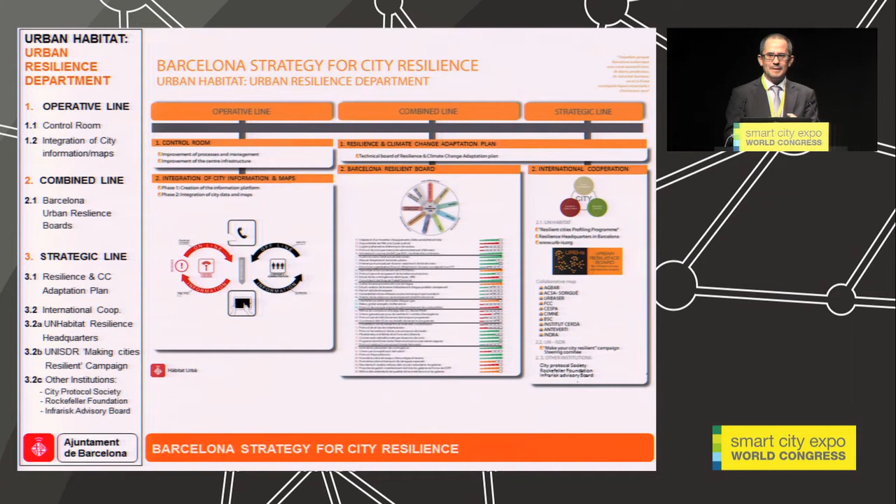So this is the main idea, this is the global idea. My presentation was more a description of each of these lines, of each of these actions, but I think I have explained the main idea now.

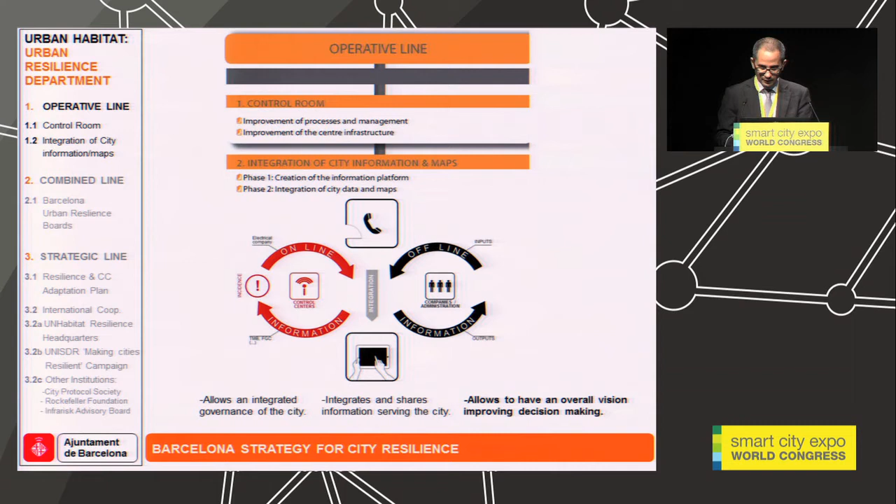Anyway, this is the operative line. This is the integration of city information maps, offline information and online information. Offline is for accumulating the smart city planning, the maps of the city, and the online information is for the treatment of incidences, for faster communication to all the services involved.

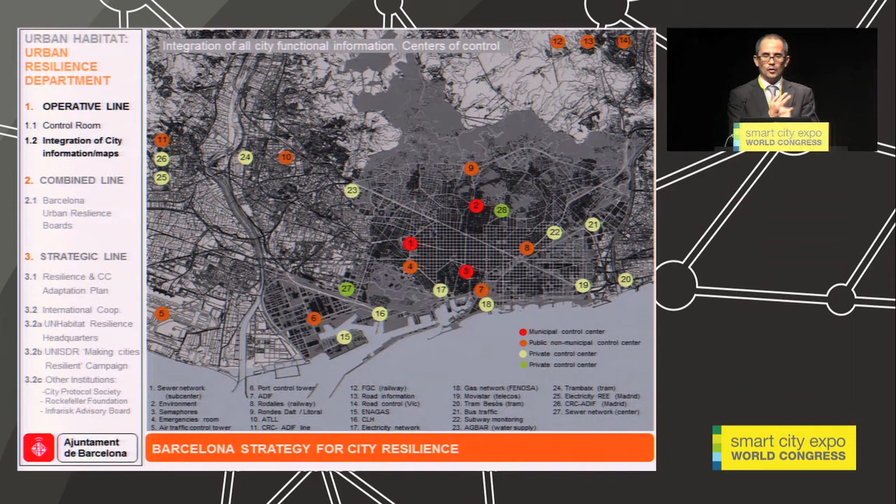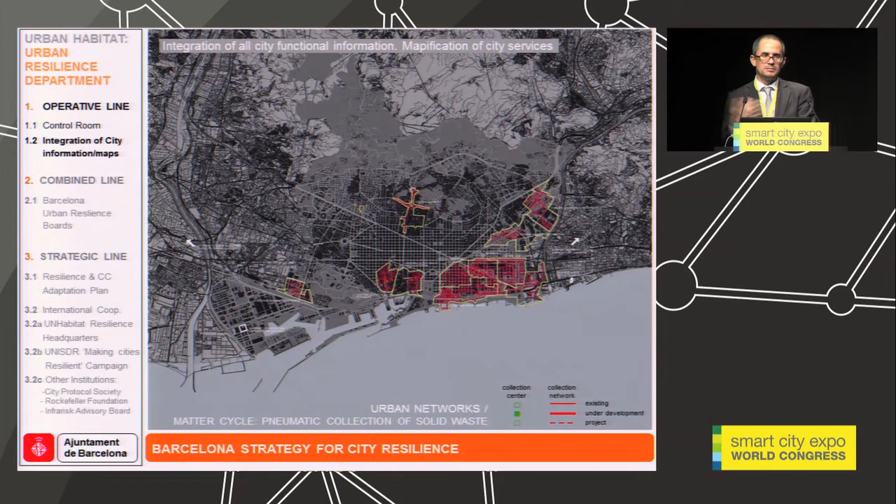These are the objectives, the projects under development related to this branch. These are all the control rooms in the city that will be coordinated by this global project of mapping the infrastructures, the different control rooms of all services - railway, roads, etc. - 27 of these centers. These are all the maps we have of the different services in the city: telecommunication, electricity, water cycle, fuel, etc. We are putting all these maps together to exploit all the information.

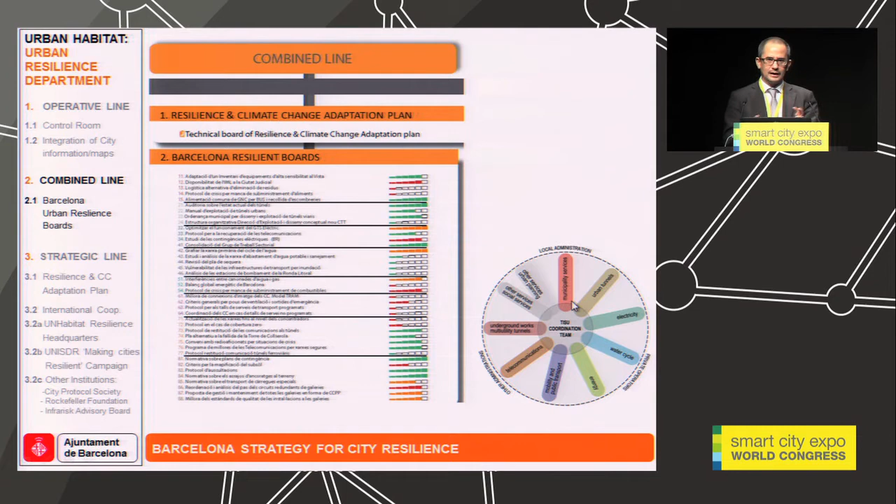Transportation networks. So the combined line, this is the map of all the projects we developed. From this, and this is the task force that we concentrated for collaboration in the development of these projects.

This is the main graph of this task force. You can see the state of the situation: 72 professionals from 37 entities and 40 improvement projects.

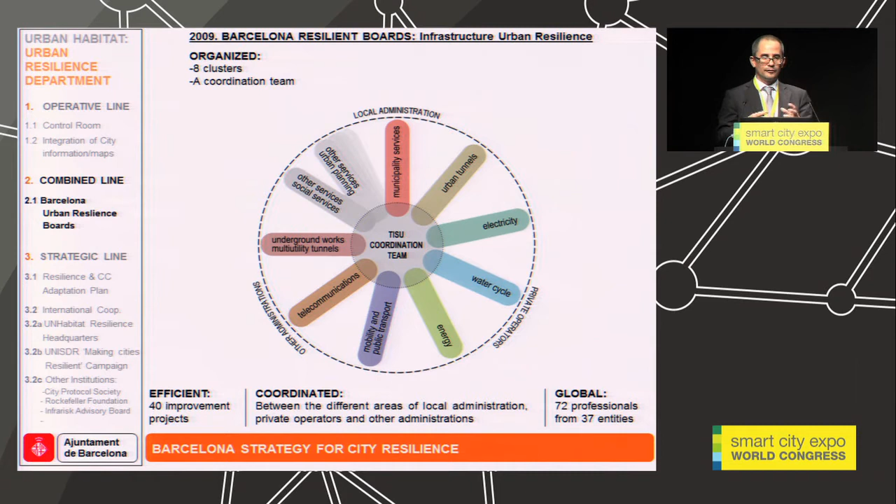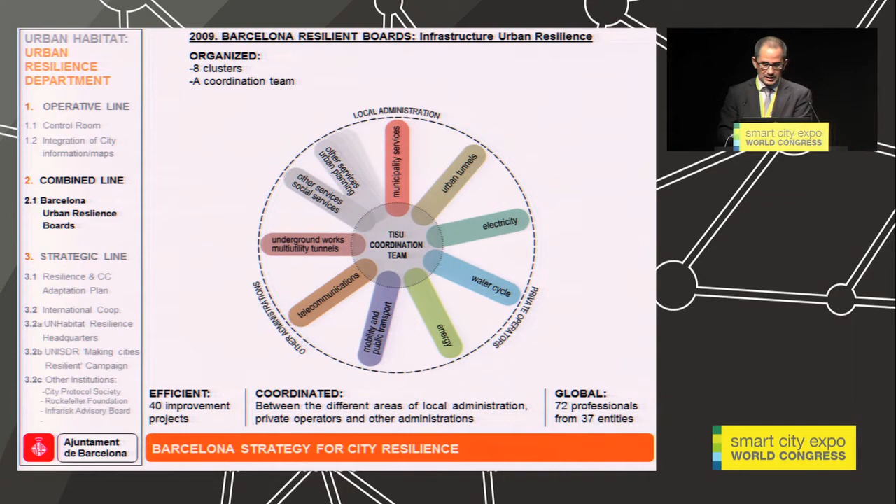We are transforming this collaboration system with other services like urban planning, social services, etc. And we will put together some of the existing groups. So we are transforming this system that was originated in the technological way for the implementation of the climate change plan, climate change and resilience plan.

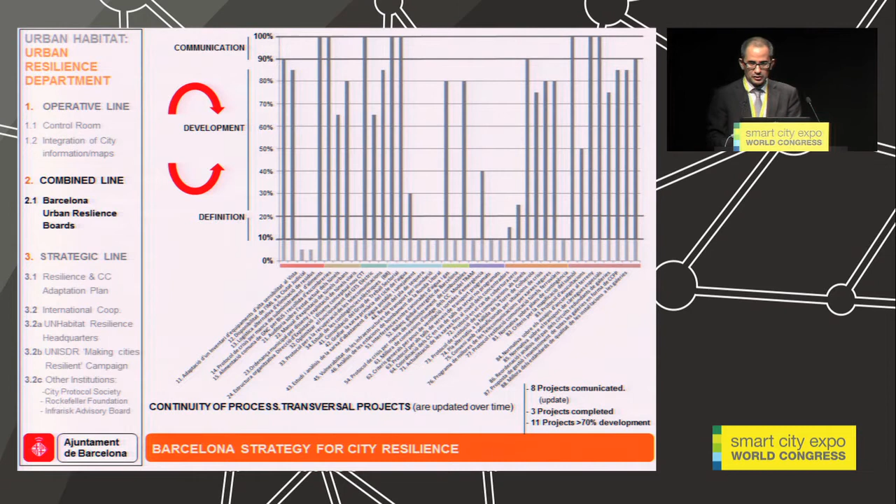These are the state of all the projects. We have 8 projects communicated and finished, and then 3 projects completed, and 11 projects that are developed more than 70%. And these are the state of different projects. I will not explain.

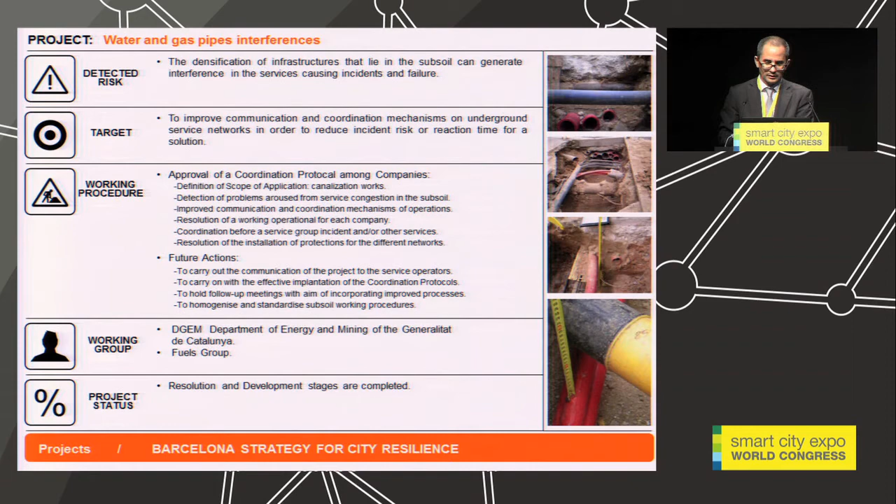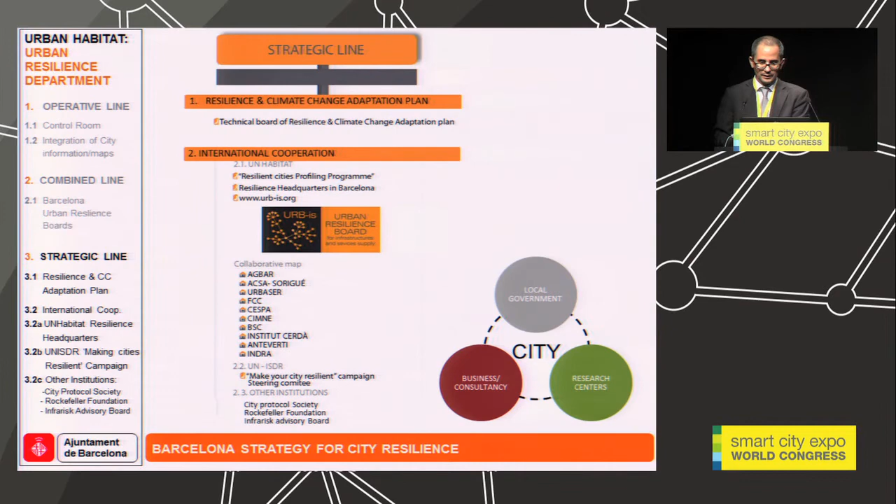With UNISDR, we are part of the steering committee of Make Your City Resilient campaign. And we have another collaboration, like, for example, the City Protocol Society. I will explain there.

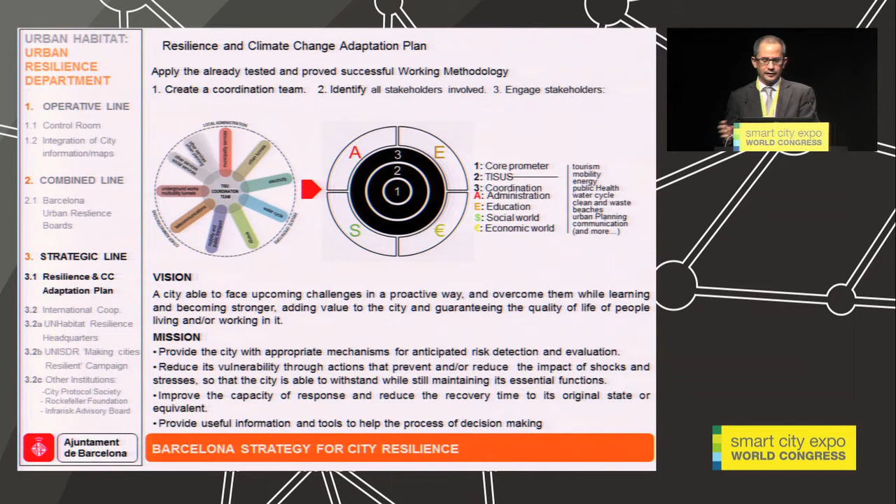This is the transforming of the actual situation for the future one. It was the beginning of our process in the Bonn Global Forum for Urban Resilience and Adaptation, when we discovered that we can add value to the other cities in the combination of all the resilience related to not just the infrastructure and the other services.

There was the signature of Joan Clos, Executive Director of UN Habitat, and the Mayor of the City of Barcelona, for the implementation of these offices in Barcelona, and the rest of cities that are involved in the CRPP program.

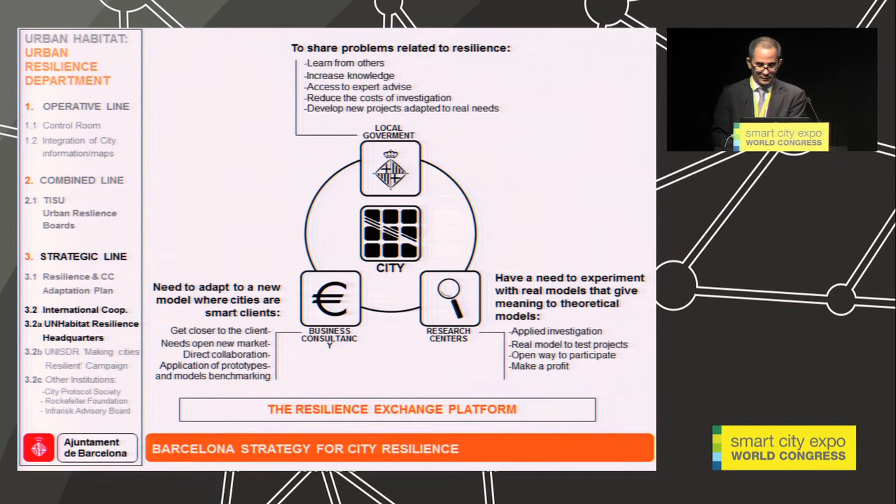This is the scheme of the combination of all the stakeholders that we have to involve in this process. With these actors, we configured a platform that is URB-is, Urban Resilience Board of Infrastructure and Services. We gave this platform to United Nations, and I think in the future of United Nations, it will be the base platform for the collaboration between the cities.

So actually, it's not a platform of the City Council, it's a platform of United Nations, but I think it's part of our collaboration. This is the certificate of Barcelona, like a role model for infrastructures and services, and like a member of the steering committee of the campaign.

The inclusion of all this process related to urban resilience inside the City Protocol Society was founded some weeks ago, and one of the first branches of City Protocol is resilience. So I invite all the entities and enterprises working in this field to collaborate together to implement the city protocol contents.

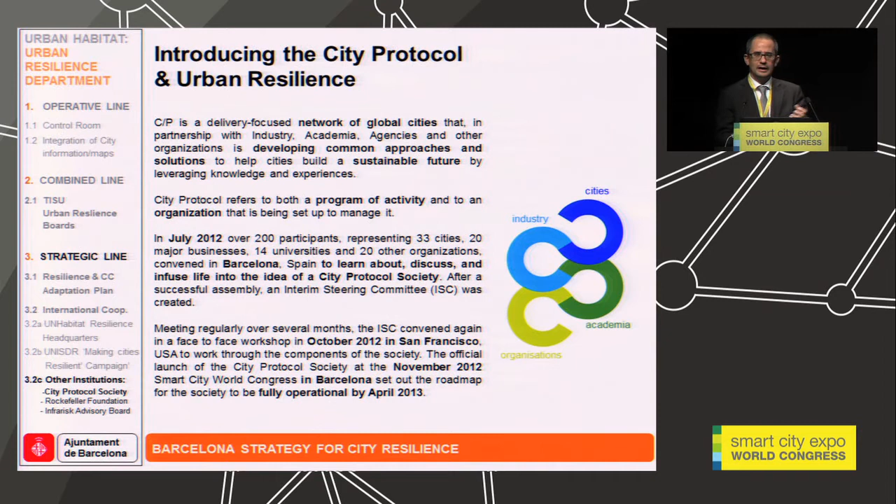It seems the city protocol is related to the understanding between cities with a global terminology. So I think it's a very good thing, because for collaborating and sharing experiences between the cities, it's very important to talk in the same language. And this is all the information.

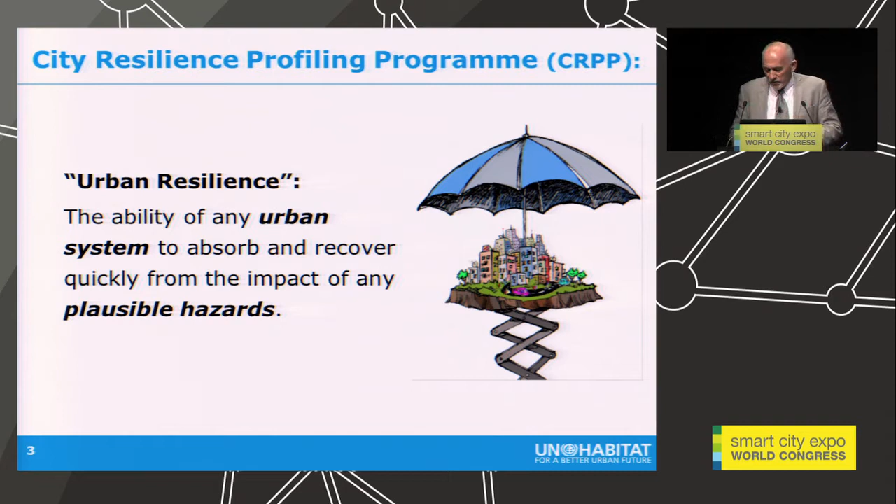And finally, I'll introduce a new concept that builds on what Manuel mentioned about our resilience profiling program. So, reducing ambiguity: first thing is to have a definition you can live with. For us, after a lot of soul searching, this is the definition we came up with, and we don't deter from this—everything we do fits under this kind of framework definition. Urban systems and plausible hazards are the two key factors in this definition for cities.

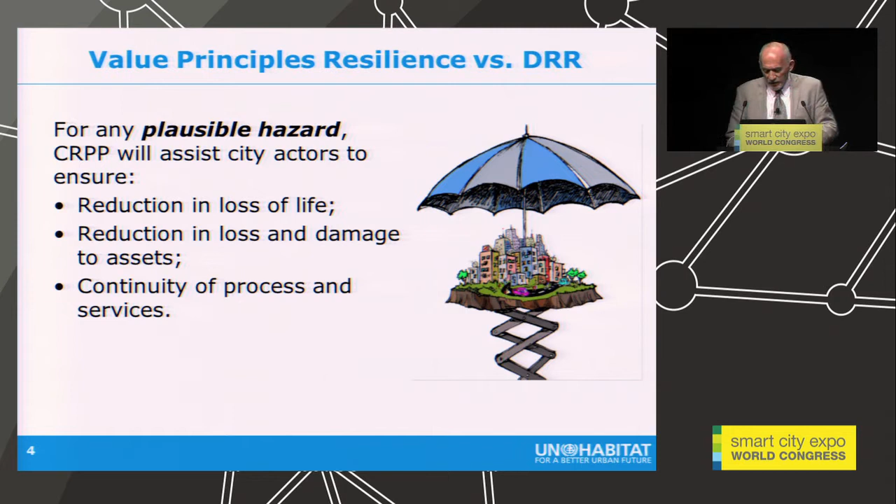A couple of value principles: the first two, loss of life and loss and damage to assets, are the value principles for most risk reduction programming around the world. What we see missing in a lot of the work we do, both within the UN and outside the UN, is the whole continuity process—the continuity of function of cities, the continuity of processes that take place in cities. Consequently, what we're trying to do is build the widest potential array of hazards that we can test, ones that would plausibly impact the cities we work on.

So this is the framework under which we are developing the broad framework under which we are developing a set of tools, a set of guidelines, a set of indices that will ultimately inform the standards that we try to promote at the conclusion of our research and development and tool development programming.

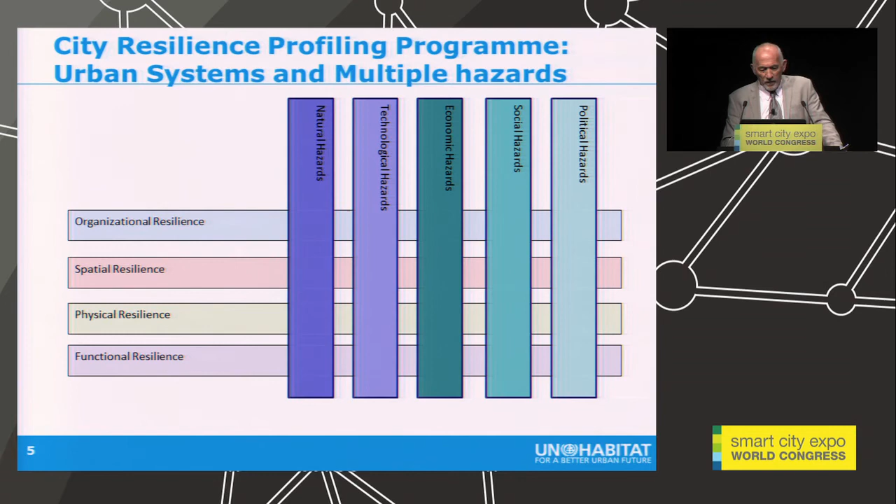Again, a key feature here is reducing ambiguity, increasing certainty. Why do we do that? The billions of dollars, you heard the numbers James mentioned earlier, that are lost through disasters over the last decades, all have to be reinvested.

And a lot of our partners are saying, well, hang on a minute, we need to think about this a little bit more. Building back better doesn't quite do it. It's not enough. Building back elsewhere might be enough in some cases, but we need to think through a little bit more of the certainty of investment in reconstruction and in building resilience.

Just a note on the catalyst: it's a sad fact of life that interest in building resilience is generally considerably higher following a disaster than it is before one.

And in many of the cities that we work, the highest priority, as Manuel said, arises as a result of a range of different crises. Multiple hazards, we talked about already. The consideration of withstanding and bouncing back is looking at issues like resistance and elasticity of systems, and trying to calculate and calibrate the degree to which city systems can do this.

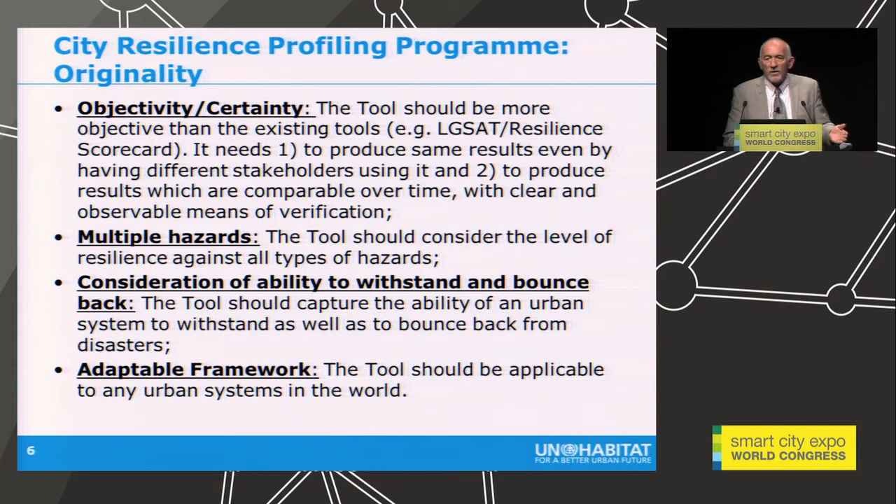And obviously the final principle is what we develop has to be useful everywhere. It has to be useful in Balangoda in Sri Lanka, and it has to be useful in Los Angeles or anywhere else. So it's adaptable, the framework is adaptable.

What are the benefits? This is what we're talking to our business partners about: credible commitment and investment, opportunities to apply local strategies. The stuff that Manuel talked about is not applicable in Balangoda or in the Philippines at the moment, but eventually it will be. And the lessons they learned and the process they underwent to get to where they are today, far ahead of many cities, has real added value, both for the private sector partners and business we work with, but also for the agencies and the humanitarian community we work with as well.

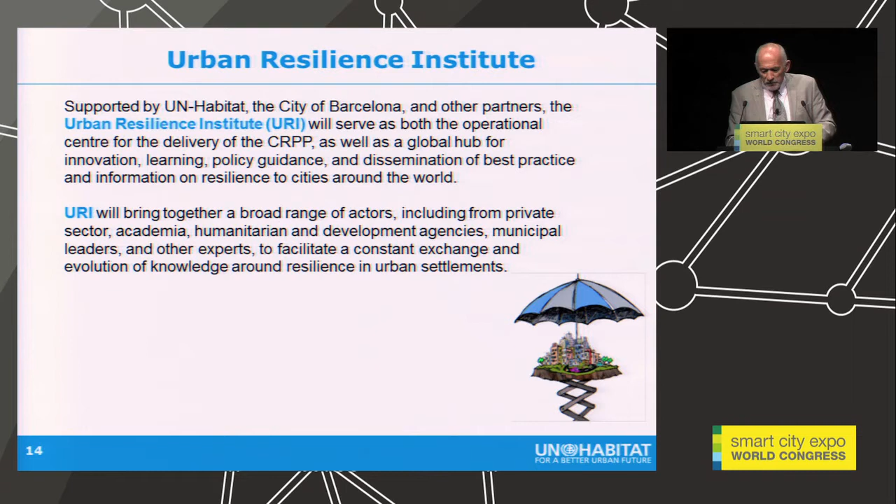And the third is operational stuff - working directly with cities, or with city networks, or with partners who are working with cities in actually implementing programs on developing urban resilience. This is where we hope everything will conclude and become public domain during Habitat 3 in the latter part of 2016.

And that's everything I have.

Thank you very much, Dan. Appreciate that. Next on our list, I'd like to welcome Ignacio Valero, the Manager of Technology Transfer at the International Center for Numerical Methods in Engineering, or CIMNE. He's also an Associate Professor at the Universitat Politècnica de Catalunya for the past two decades, with extensive experience in various infrastructure fields across Spain. He's going to talk to us today about the role of prevention in building resilient environments in developing areas. Thank you, Ignacio.

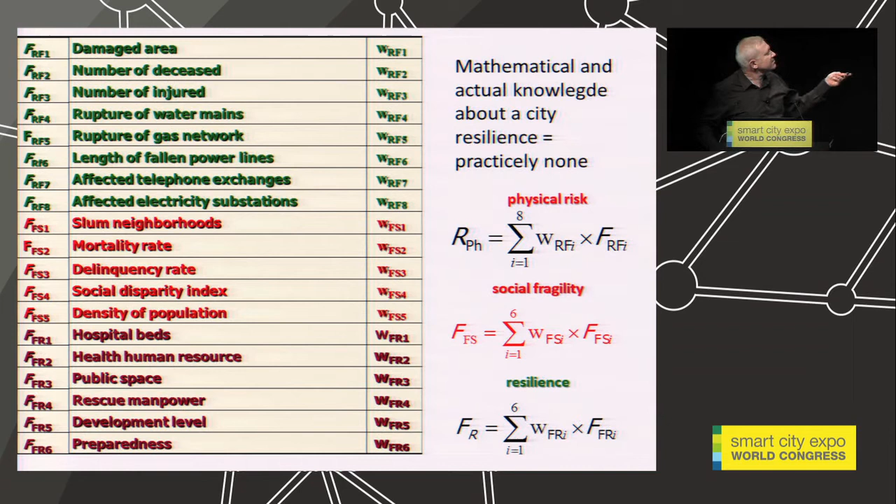When we go to the formulation, our core way of work, we analyze all these indicators. We have, for example, a formulation for resilience that at this moment maybe doesn't say much to all of you, but we think that mathematical and actual knowledge about city resilience is practically unknown, or only a bit of it exists—we need to develop more.

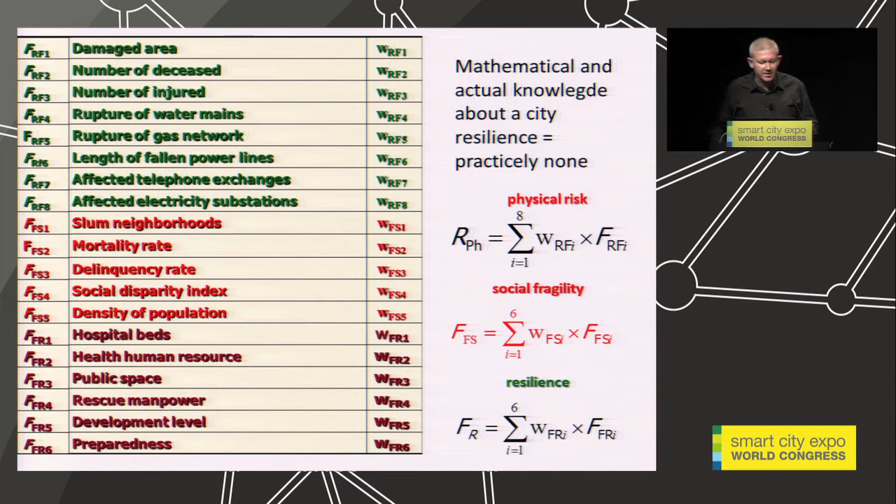I ask myself, is this the way to address the problem, this kind of analysis? I don't know. Here we see a formulation which continues to be an approximation. We know resilience is not simply the inverse of the risks as a mathematical development, but that mathematical development is necessary to achieve results that could be evaluated to get objectives, more than just statistics, which Dan showed a moment ago.

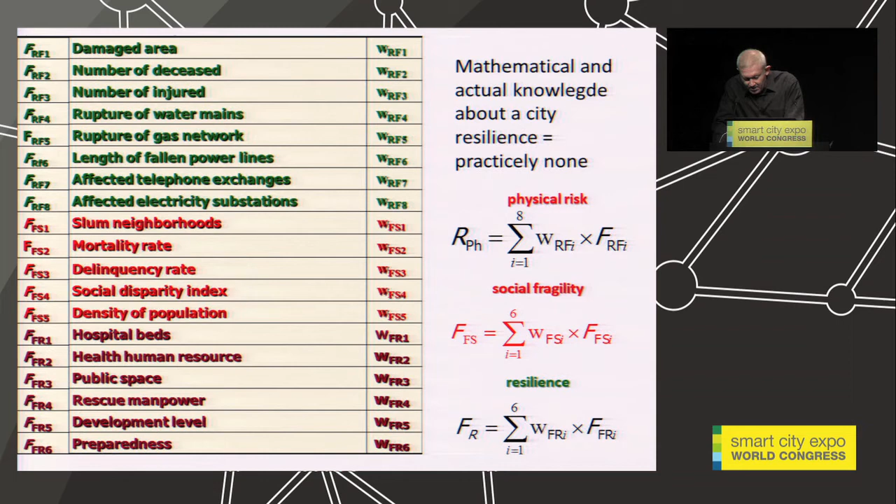How do we address the problem when the urban environment does not yet exist and we want to preserve it—also be systemic and resilient? Right now, we think that is science fiction, but we do have some capacities, of course.

Estimating risk, for example, as in the case of the earthquake in Barcelona, we are able to map this risk and determine the different scales in different places of the city. But we are not out of the place of risk yet.

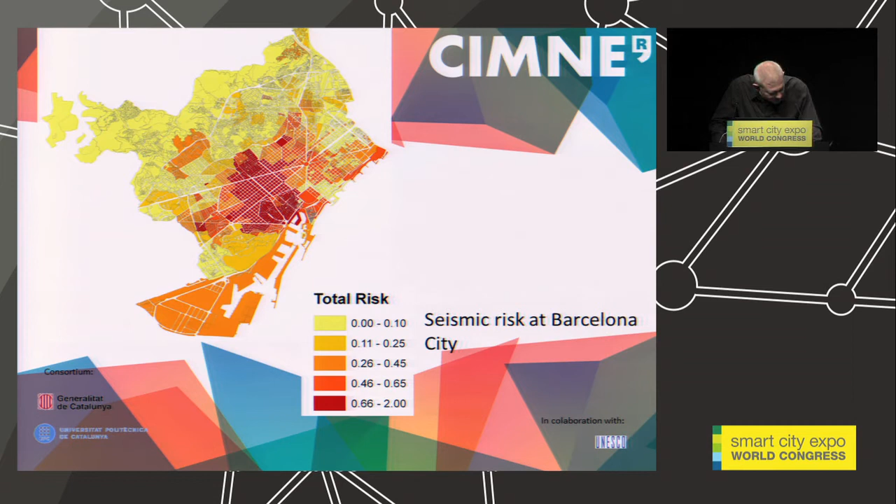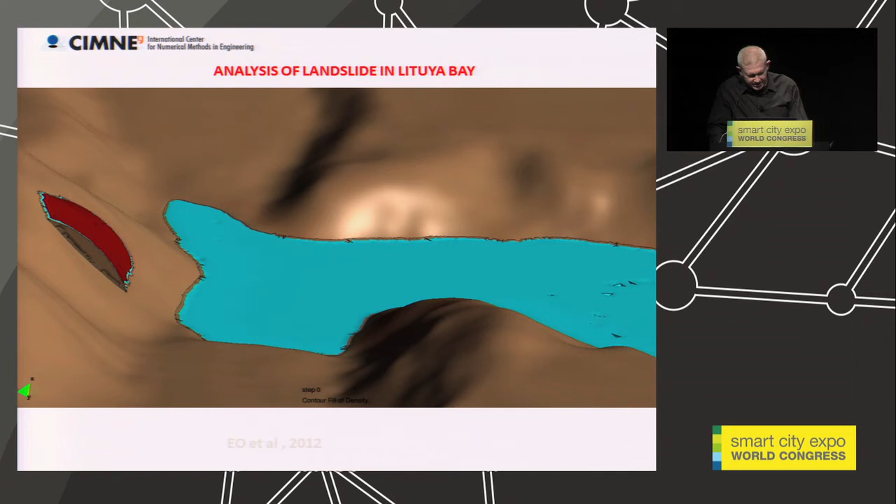Other capacities, maybe more sophisticated, for example, we are able to do things like you'll see. This one is the movement applicating the particle finite element method, of a slender piece of earth into a mass of water, or for example...

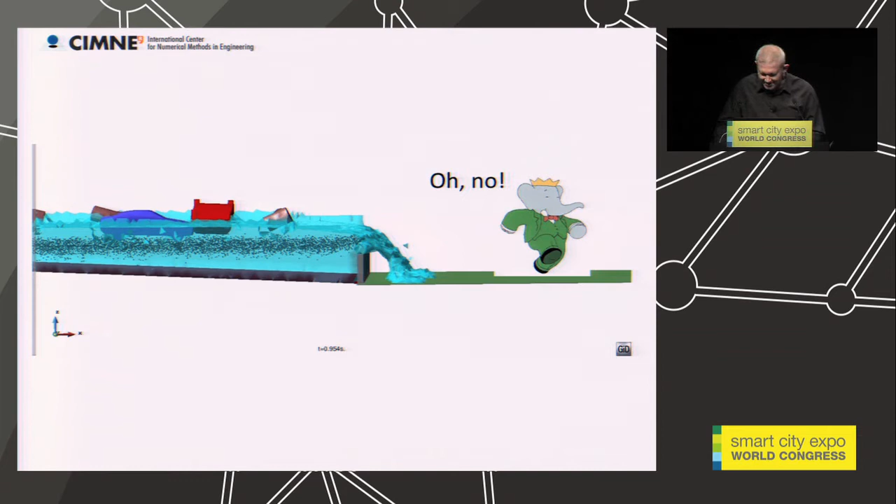The next one, Babar, not our elephant, represents the Fukushima simulation. You can see here the particles - the particles are a real novelty, an extension of finite element method, moving into a fluid with other elements in movement.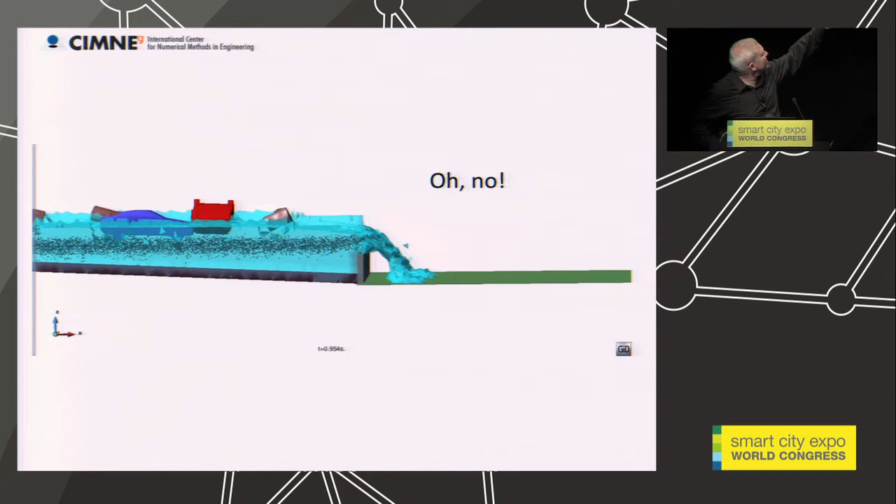And we can simulate, for example, this one, if it is able to play. I don't know why... well, I cannot show it, I can't see the simulation. I'm sorry, in this case.

But we are able to simulate the movement of the particles, the impact over the wall, after the fracturing of the wall, and how the elements in the fluid are moving in every situation of environment in a contour.

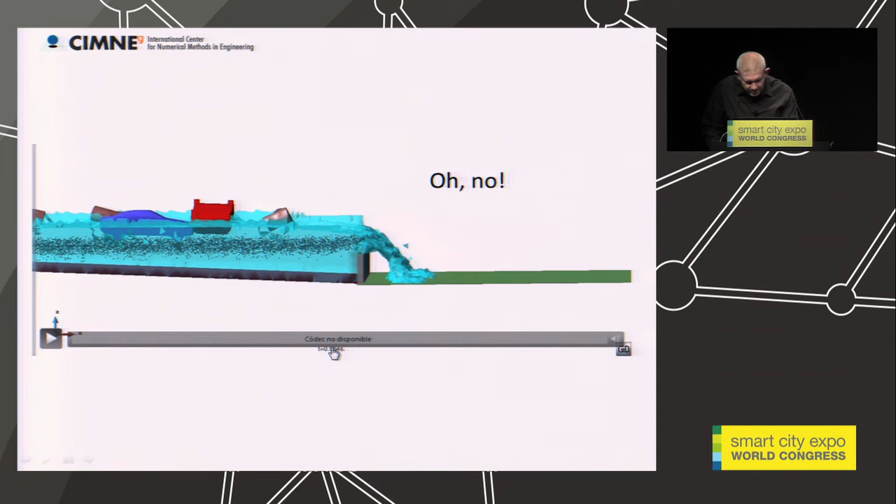At last, we do not want to keep seeing our friendly elephant taking a bath in the coast near future Dar es Salaam. We would be less happy if that happens, and therefore the obvious concerns here about resilience are not trivial.

To finish my speech, I borrow from my friend Manuel Valdés this sentence: in major scenarios, it's time to act. I think it was time to act, but I add another message - the most important one in this presentation: it's time, with more cities coming soon, to think intensively and deeply about resilience, to be happy jointly designing our environment and the urban habitat. If the preoccupation about environmental questions is human happiness, then maybe developing new towns from the point of view of resilience is also part of human happiness. Thank you.

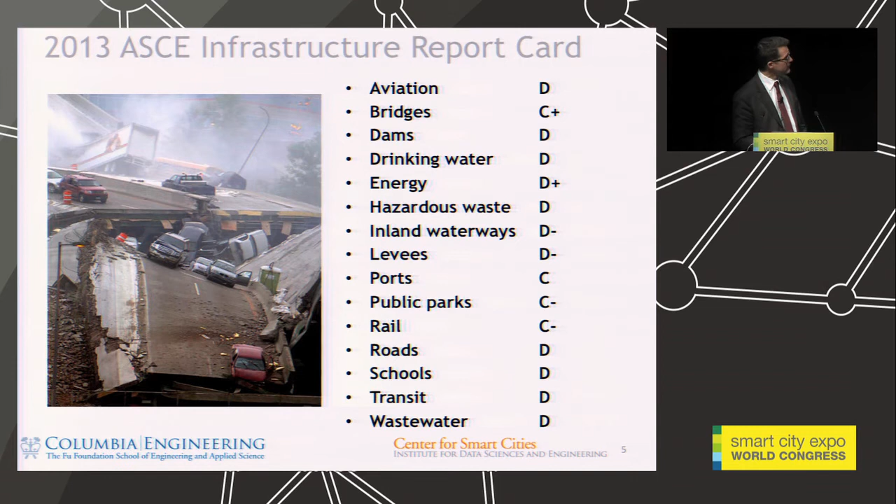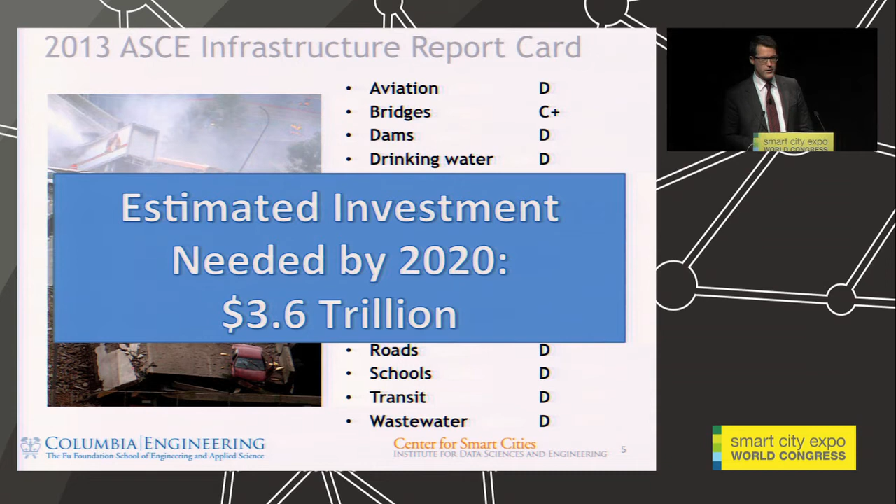Now, what I'm talking about in terms of resilience is against the backdrop of a US infrastructure which is in decay. Roughly speaking, we invest about half of what we used to, relative to GDP, compared to 50 years ago. This is widely publicized - the American Society of Civil Engineers infrastructure report card, which grossly assesses our key infrastructure elements, gives an average grade of D+. That's upgraded from a D in the 2009 report. They also estimate the required spending for 2020 at roughly $3.6 trillion. So there's a major change in investment needed.

So this is the backdrop under which I do research. From my point of view, resilience in the background is actually a decaying infrastructure. So while this is sort of an emergent or slow process, we may also be subjected to pulses or strong events, hurricanes, earthquakes, and other technological hazards.

My research is primarily in bridge infrastructure, so I'll talk about bridges first. Then afterwards, some discussion on flood risk assessment in New York City, which relates to the recent Sandy occurrence. And also I'll touch on some work in electrical grid city-scale risk assessment.

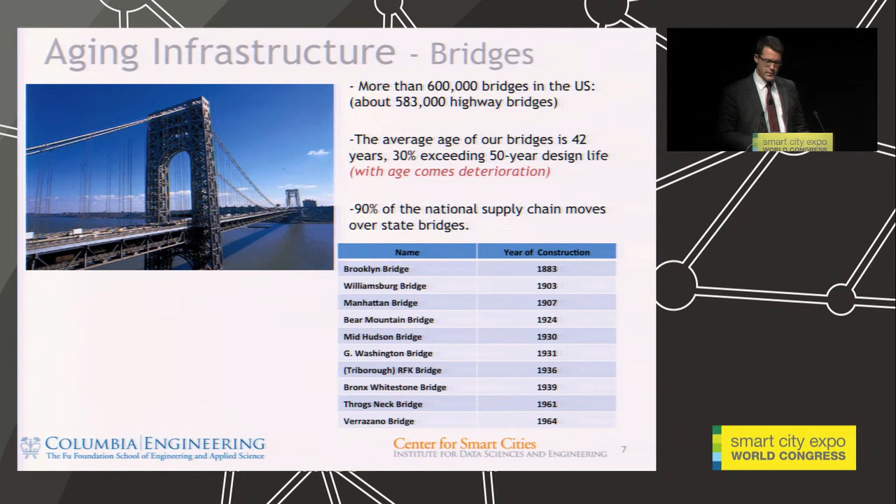In the United States, roughly speaking, 30% of our bridges have exceeded the 50-year design life they were originally designed for. So obviously this is a vital issue.

In Manhattan, we're an island, but all the different boroughs are connected with several major bridges. The examples I'll show you are on major landmark bridges, the first of which is the Manhattan Bridge, which has just exceeded 100 years in age.

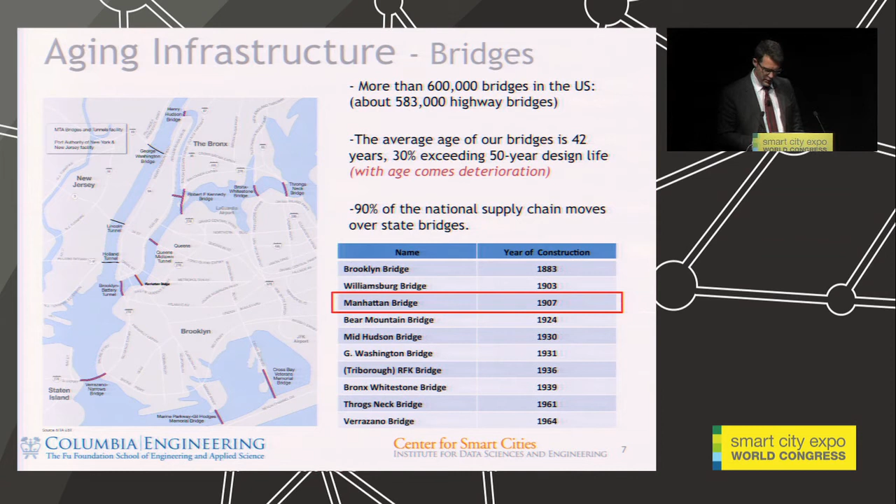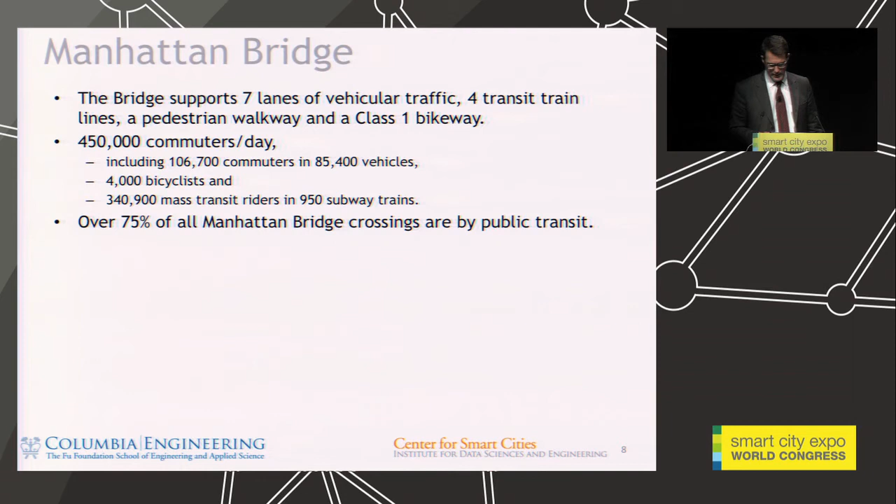Here's an example. It carries nearly 500,000 commuters per day. This is pretty typical for the East River bridges in New York City. A lot of that is mass transit, as you can see, so subway trains cross the Manhattan Bridge on a rather frequent basis.

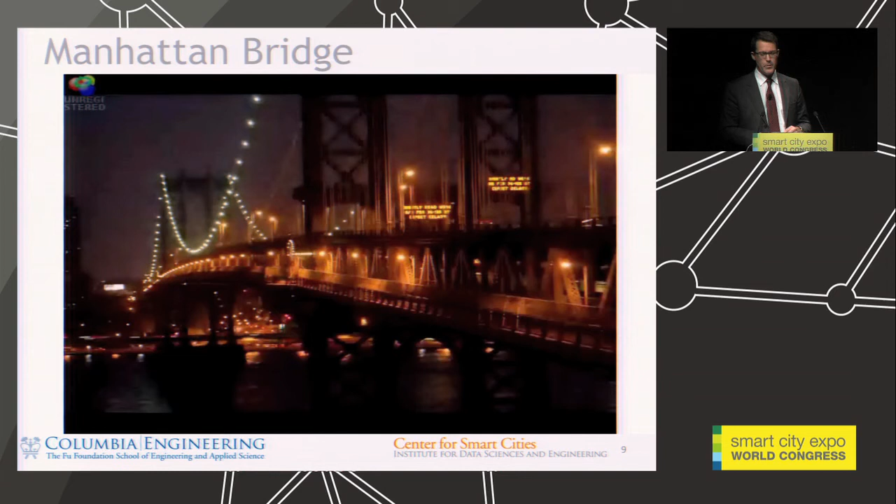This is a stop motion video over a normal day, so no particular hazard, but I'm trying to convey the idea that routine daily wear and tear causes tremendous fatigue loading and cycles on each individual component. So one of the things we need to understand in order to assess our current vulnerabilities is what the baseline condition is of our infrastructure today.

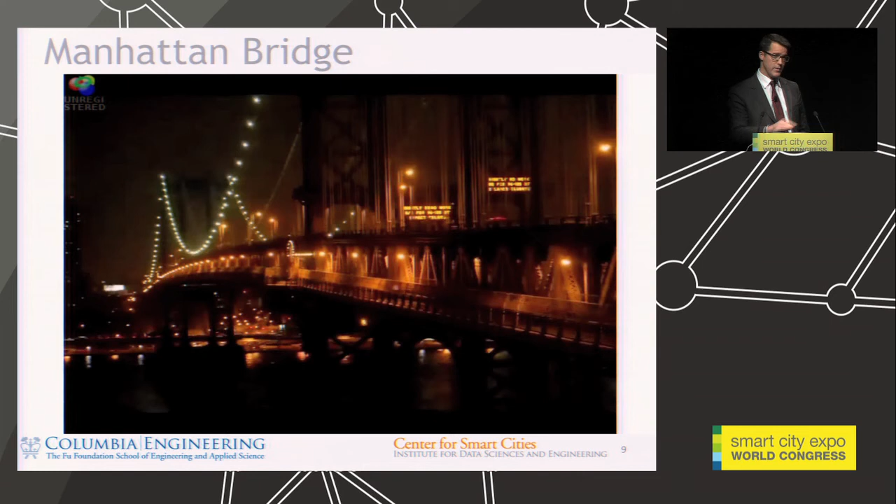Remember, it's in a declining condition. So how do we do that? This is one of the projects I was involved with in 2008. We take a lot of measurements.

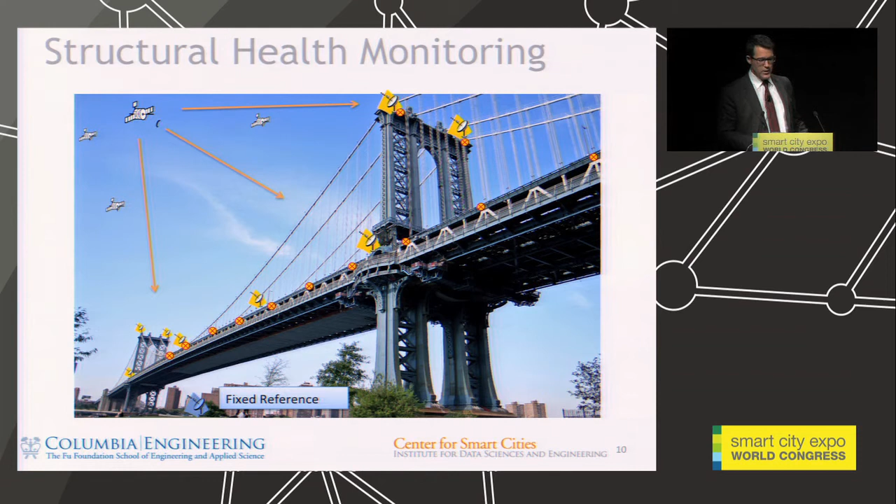In this case, we were using differential GPS to get very accurate dynamic displacement measurements, and we coupled that with an array of accelerometers. We could use many other sensors as well - we do radar, interferometric radar, and plenty of strain gauging. All of this gives us a very complete picture of a particular infrastructure asset.

Just an idea of the kinds of data we can measure - these are the displacement measurements, and each one of these blips is a subway train passing. This gives an engineer direct knowledge of how much deformation there would be on a particular element. So this is very, very valuable.

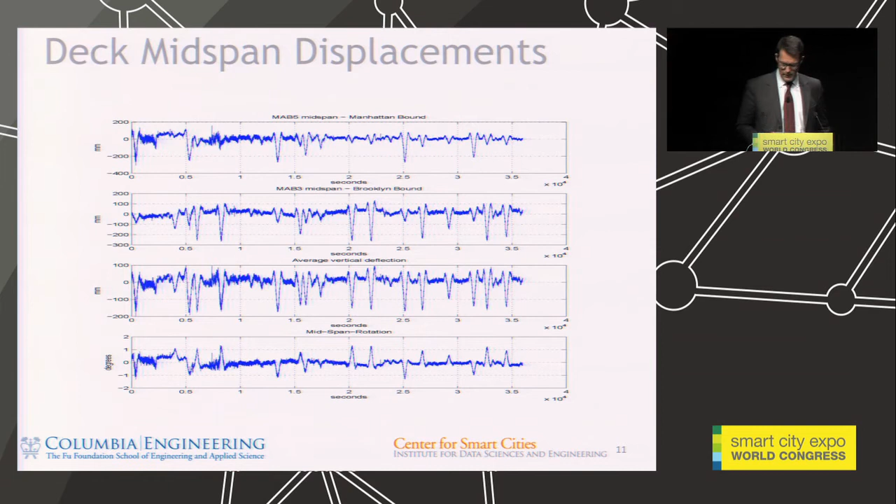It's data, but if you have a domain expert, it can be used to get very valuable information. Here we are updating or fine-tuning our mathematical model of the particular infrastructure asset, in this case the bridge, to assess its current condition.

These fine-tuned models can then be used to perform simulations. We can subject the bridge to seismic loading, hurricane loading, whatever you like. But in order to do that, you need to understand what the current condition is.

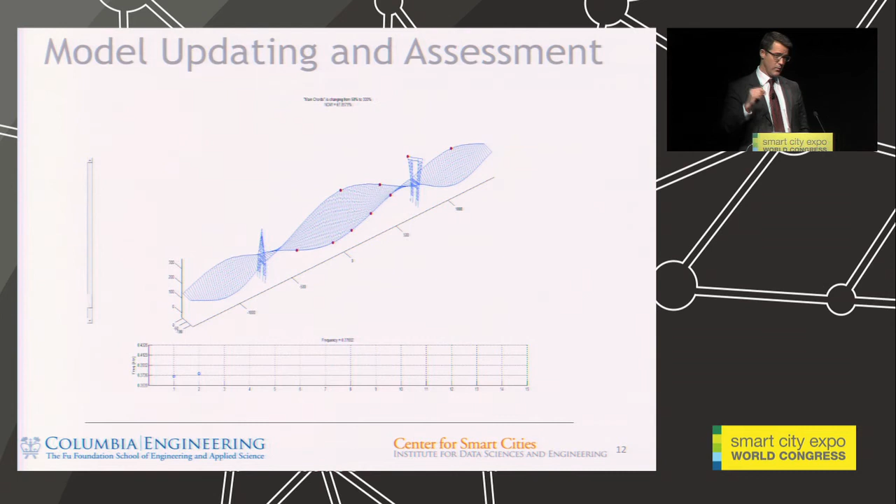We did the same thing for Verrazano and many other bridges. The Verrazano Narrows Bridge is the longest suspension bridge in America. Here's one of the tests we did during the New York City Marathon - we used this as excitation to understand how the bridge performs, in particular how it's going to perform in high wind conditions.

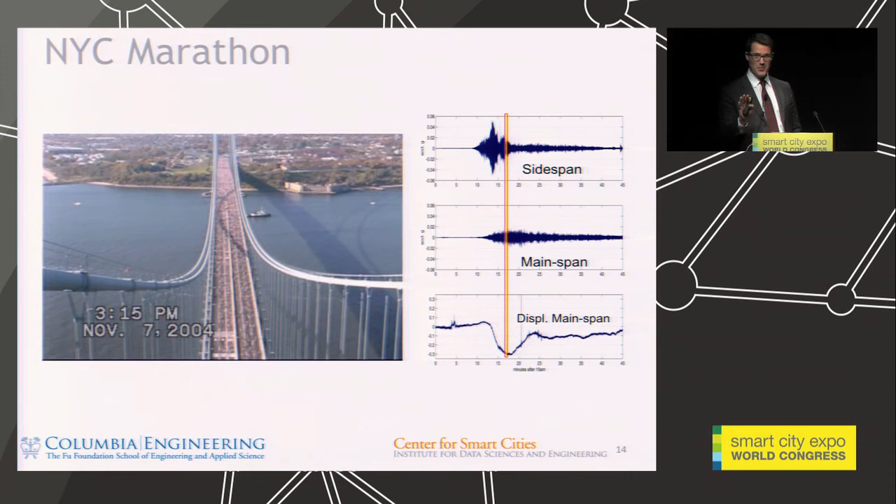These signals here, while it just looks like junk at this resolution, there's an awful lot of information that can be extracted in a diagnostic sense. That is my research, but I'm not going to bore you with all of those equations and theories.

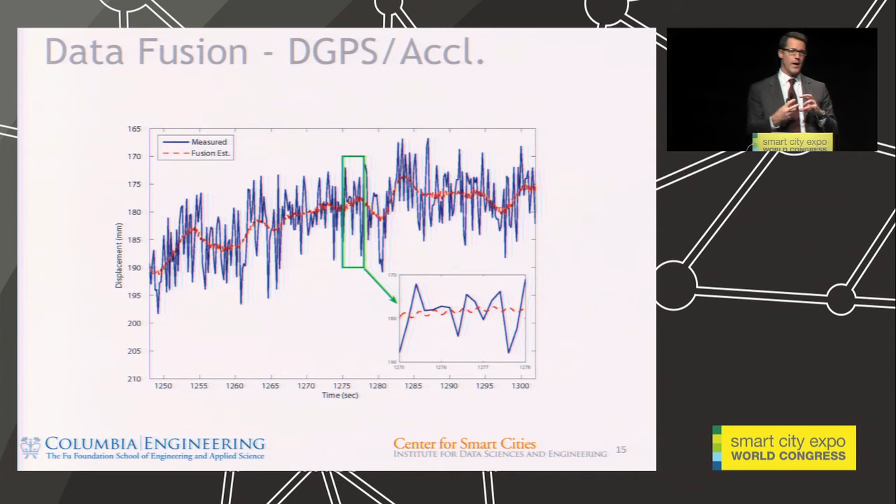Combining different kinds of sensor data also has a lot of potential - we call this data fusion. If you can see, this is a noisy data set, but if you combine other kinds of data, you can actually denoise data, and that's very helpful for high accuracy models.

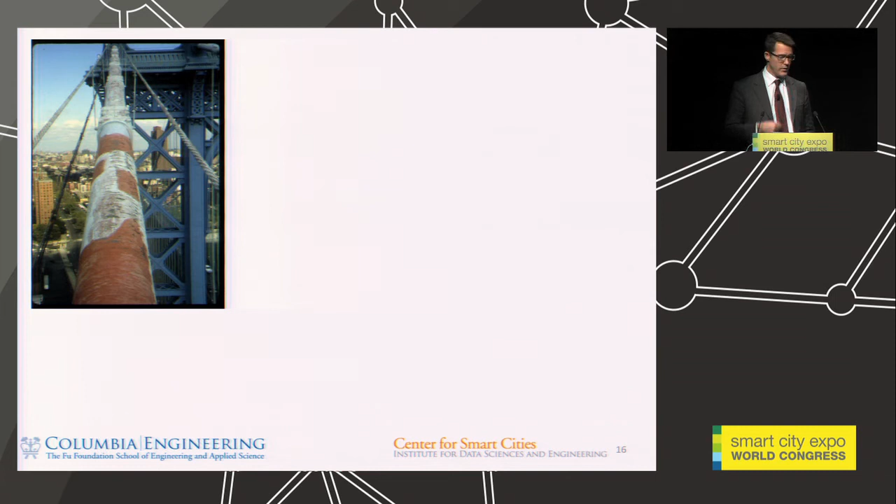One of my colleagues works on a specific type of deterioration of bridges - this is a main cable of the Manhattan Bridge, as it happens, and he's working on the corrosion problems associated with these critical components. These are non-redundant components in large structures. And just some maybe scary photos that he provided for me.

This is when you unwrap the cable - inside there are thousands of high-strength steel wires, and you don't know at any given time how many have corroded. Obviously, once they corrode and break, then there's no longer any load-carrying capacity.

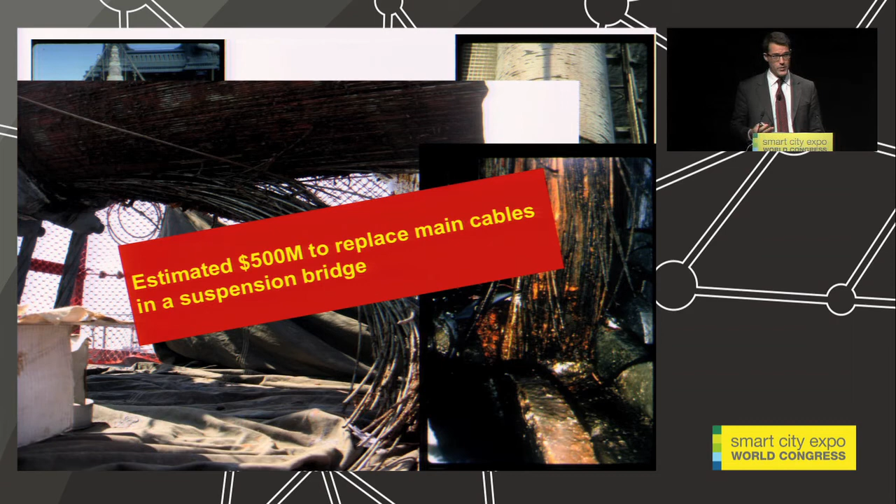This is a very difficult problem to repair. Roughly speaking, for an in-situ repair, this is going to cost you $500 million for a typical long-span bridge that we would have in New York City.

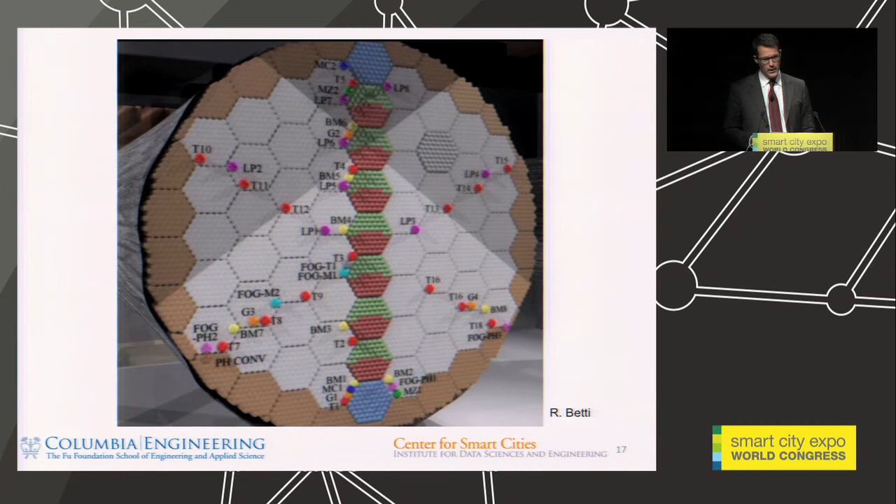So in his case, he's collecting the data directly inside the cable, performing various kinds of environmental sensing within the cable. It's a challenging problem from an engineering point of view, but he can get the indirect environmental variables that would lead to the deterioration, such as temperature and humidity.

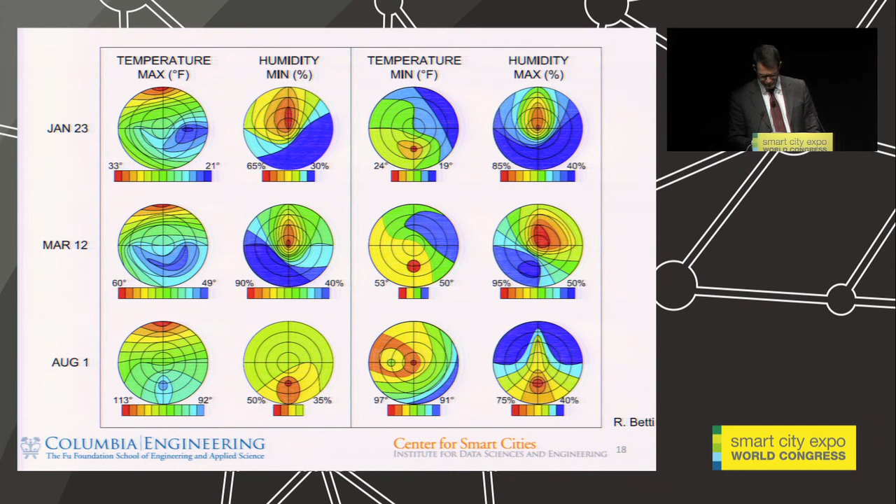Shifting gears, just because I have time constraints and I want to cover some of the work done in the center that is not bridge related, because most of it is not bridge related, I should say.

This is an analysis done by a couple of colleagues pre-Sandy, and this is the flood map. This is the red curve, or red shaded area, of New York City. They looked at two different scenarios of flooding, assuming rapid ice melt due to global warming.

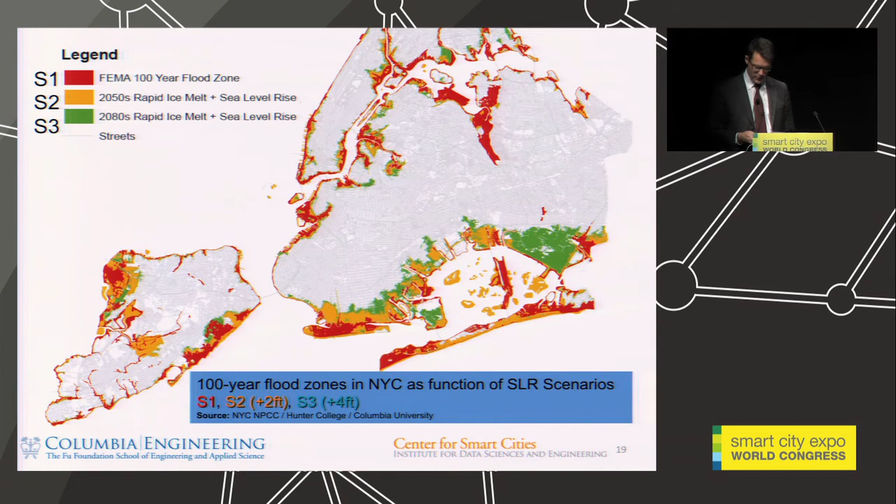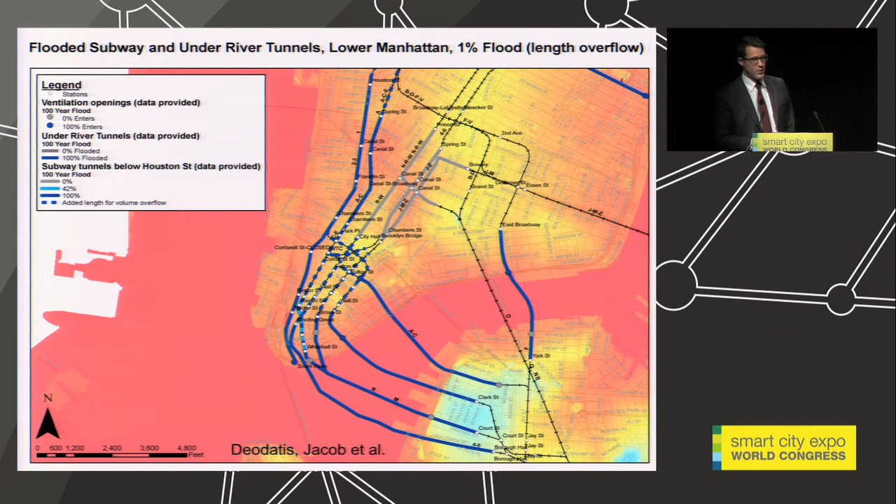And the sea level rise associated with that is the yellow and green shaded areas. The interesting thing is this is the 100-year flood. The baseline in the United States is the Federal Emergency Management Agency, the FEMA map, which dictates a 100-year flood. This is the subway flooding associated with a 100-year flood in lower Manhattan. And the interesting thing is this is the 100-year flood plus a 4-foot, a little bit more than a meter, sea level rise.

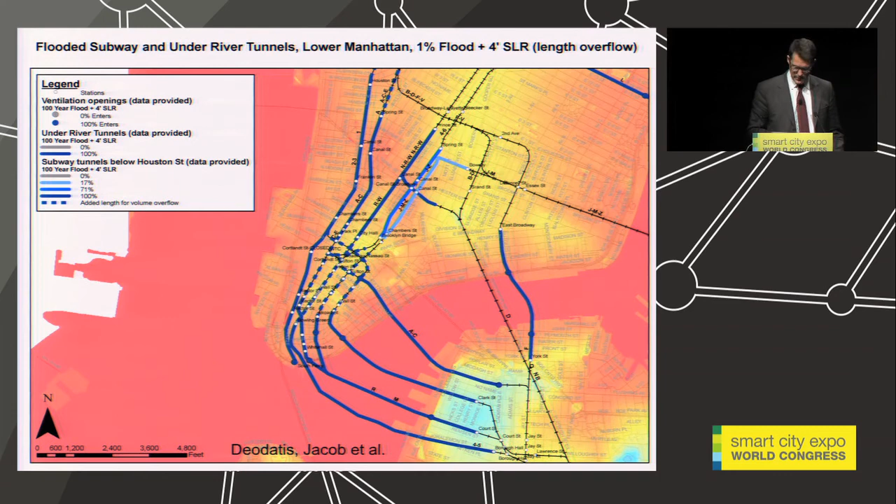This actually happened to coincide with the elevation of the Sandy event, which had surges around 13 feet. And in fact, this was done pre-Sandy — they pretty much perfectly predicted the outcome we would have in Sandy. It's kind of ironic because this station, South Ferry Station, was just being renovated at a cost of about $500 million. As you may or may not know, it was more or less destroyed and had to be rebuilt at a price tag above that, roughly $600 million.

Another part of our center, which actually existed before we were founded, is the Center for Computational Learning Systems. I wanted to highlight some of their work, working in tandem with Finmeccanica on building operating systems, basically building management systems, and in partnership with Rudin, a large real estate owner in New York City. The kinds of tools they've developed are less of a research component within Columbia, but more of a technology integration group.

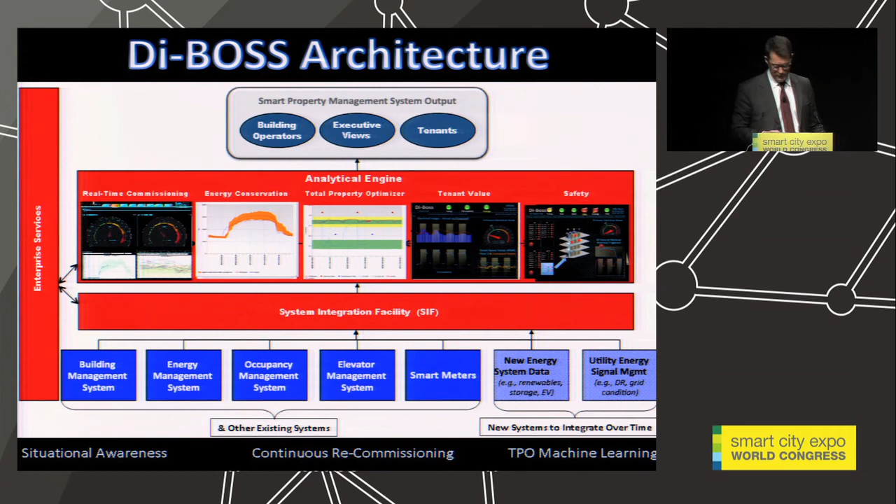And they're doing things like optimizing energy usage, the heating, cooling, HVAC systems, and also tying that together with occupancy, floor-by-floor occupancy, which is very, very helpful. In addition, you can tie that kind of information at a building level to the city grid level.

So they've also done a lot of risk work with Con Edison, which is a New York City electrical utility. This is the kind of risk and load we see on a hot August New York City day when all of the air conditioners are running.

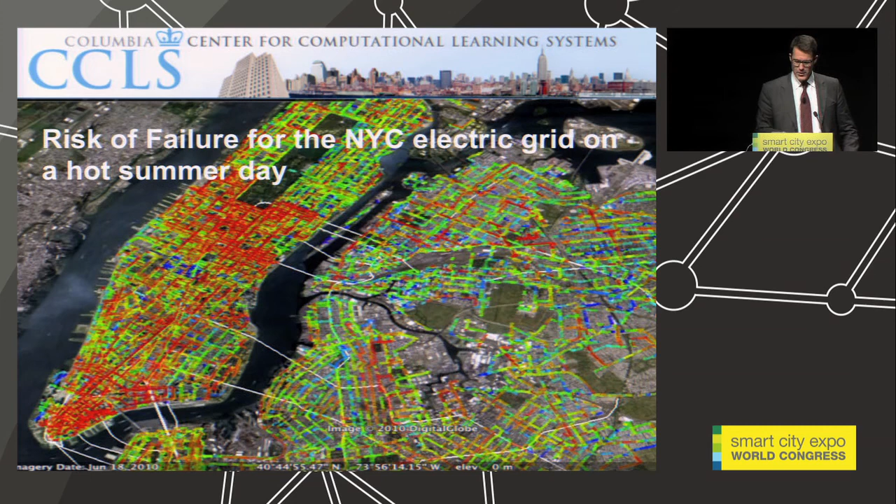But the interesting thing is, if you're running things at the building level and then look at the street level grid feeder system, you can actually realize that certain buildings become vital — their draw on the system becomes vital in the overall city network. So perhaps from some kind of load balancing or incentive pricing, you might be able to adjust behavior. And obviously the idea is then buildings might communicate with one another for this.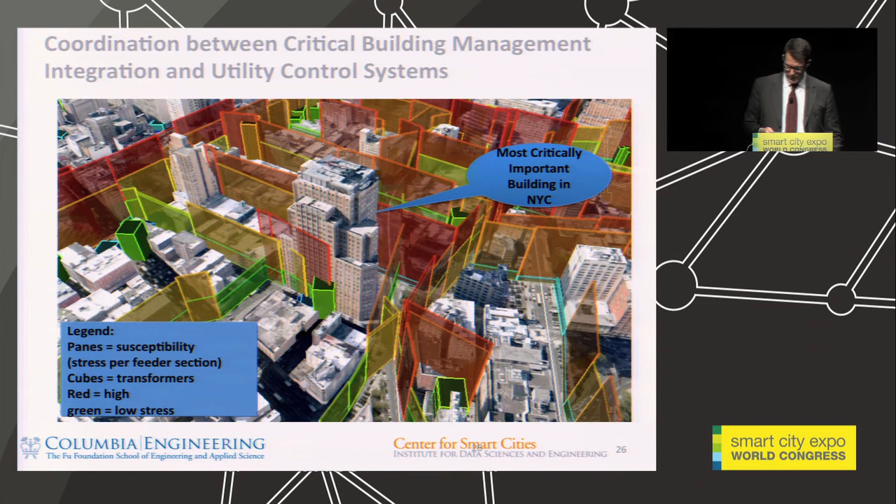So just a few messages because we're short on time. I just wanted to leave out there the idea that data and monitoring of infrastructure are key to being able to assess and manage risks, particularly from what I see as long-term deterioration to also sudden hazards. The aging infrastructure issue requires immediate action — I think immediate action was mentioned earlier — but also the life cycle cost, then we talk about adaptation in this session.

To me, monitoring is a part of adaptation. If you don't know what you have and what the situation is, you will probably make ill-informed adaptation decisions. And finally, the other key thing — there's a lot of talk about data in general, but what is absolutely essential is that data be converted to information. So it's very important to have a close connection between the data that's collected and domain expertise. So I'll leave it at that. Thank you.

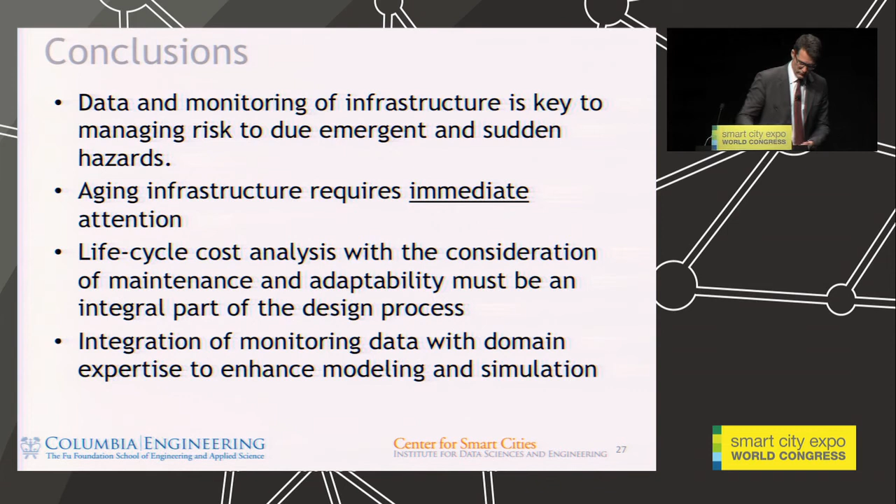I see a hand going up at the back. Is there a microphone going out to the audience? Can we get a microphone there? I can't quite see the back, but we're not such a big group, so we should be able to hear you. Can somebody get a microphone to the back right? I think there's something en route. We have another one, we can pass that along to the center. Sorry, maybe we can hear you if... oh, there it comes. Just over there, right? I think he's turning it on. I'm sure we can hear you from here.

The presentations have been very interesting so far. My wife and I intend to visit Istanbul as soon as we can, because we want to get there before the earthquake hits. Apparently there's been a series of earthquakes moving west along the North Anatolian fault. Who is working on the resilience of Istanbul as a city?